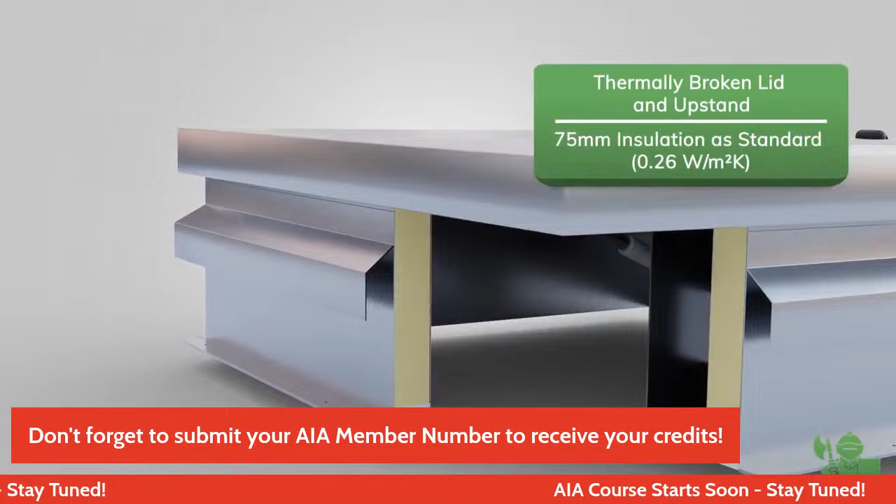The final touch is a wireless remote control, which operates the powered actuators, meaning no wiring is necessary. SureSpan roof hatches are fitted with an external curb liner as standard, ensuring easy on-site installation. The thermally broken lid and upstand with 75mm insulation provides a U-value of 0.26 watts per meter squared. Also available with a non-combustible mineral wool insulation. Did we mention no electrician is necessary? We simply don't accept that things can't be done better. Join our journey towards carbon positivity.

Who knew access hatches could be so exciting? By working with us early on in the design process, you can ensure your clients have a finished product they are happy with, with no expensive oversights or delays. We'll give you the technical advice and guidance you need when specifying these types of products.

As a global manufacturer, sustainability and managing our economic impact is paramount to our beliefs. We are continuously improving processes, products, and materials to reduce our carbon footprint. Initiatives such as our partnership with Ecologi allow us to plant a tree and offset our carbon emissions for every roof hatch we manufacture. We've recently been accredited with BSI quality certifications for environmental management and quality management systems. That's enough about SureSpan - let's begin the presentation.

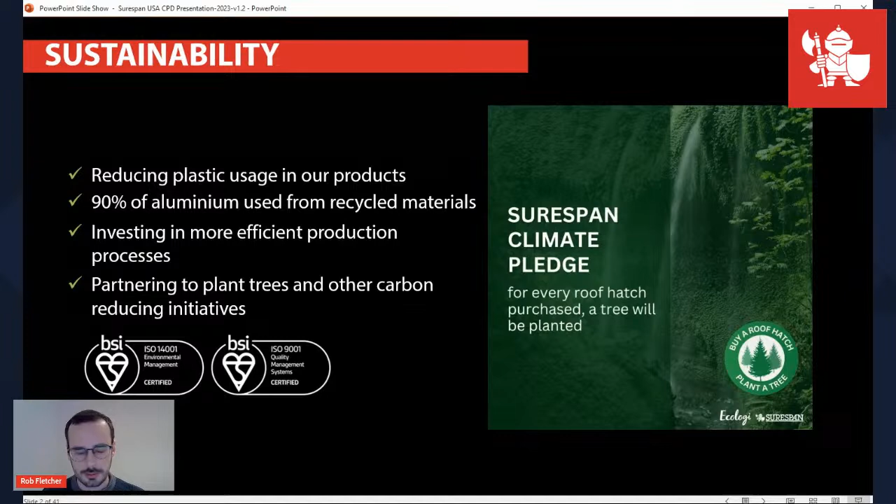Our learning objectives this afternoon are to provide good guidance and help create practical specifications for the safe use of roof hatches, with consideration to the client and the overall project requirements. Firstly, we will run through the specifications you need to consider for roof access, followed by the safety features and then performance. Once we've specified our roof hatch, we'll explore what bespoke solutions are available for more creative problems. Rounding off the roof access section, we'll have a quick look at ladders and then glass specifications, and finally moving on to considerations for large equipment and plant access doors installed in the floor.

Floor and roof hatches are used to access plant or equipment, either in basements or on roofs, to carry out maintenance to such areas. But note, we do not recommend roof hatches should be used as part of a fire strategy. When designing and specifying roof hatches, please also refer to the International Builders Code, OSHA health and safety standards, and work from height regulations.

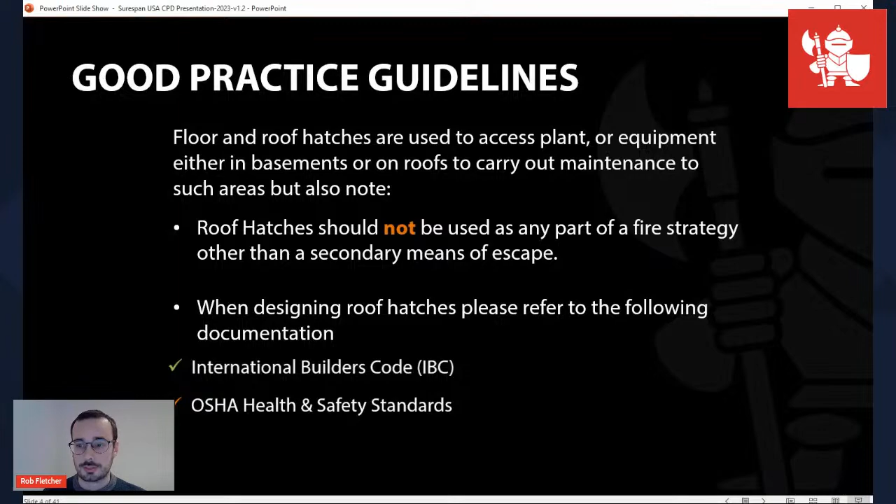We will shortly begin with the design and specification of roof hatches, from standard hatches all the way up to large bespoke designs to suit a variety of project requirements, from single leaf egress, as you can see in the top left, to large double door designs. There are multiple considerations and requirements you need to keep in mind, including wind and snow loading, how regularly these hatches are going to be used, and the kind of environment they're installed in. We'll touch upon all of this in the following slides.

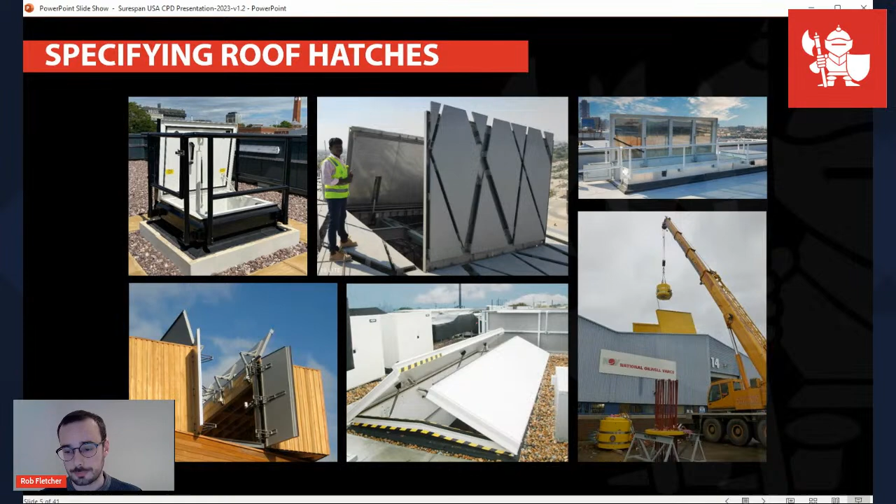When specifying a roof hatch, you need to consider the following. What type of lid do you require? Is it glass for natural daylight and a premium finish? Or is it just a plain solid insulated aluminum lid? Or alternatively, you could go somewhere in between with a polycarbonate dome.

Do you need secure locking or access from above? We'll touch upon this in the next slides. What type of gaskets and seals does the roof hatch come with as standard? Does it need to be airtight and weatherproof? What type of internal handle do you require to ensure safe operation? This internal handle can also be aligned with staircase handrails and other handrails to ensure a continual handrail line up the staircase. Is the hatch thermally broken, preventing condensation? Does it also come with an automatic locking safety stay?

What finish do you require? Is it a polyester powder coated finish as per the image, where we generally recommend white on the inside and a colour to match the surrounding roof on the outside, or blue, or pink, or red? Any colours are available.

Is the project going to be located in a corrosive environment such as near seawater, in which case you may need to consider additional powder coating, which is a higher quality finish, or stainless steel.

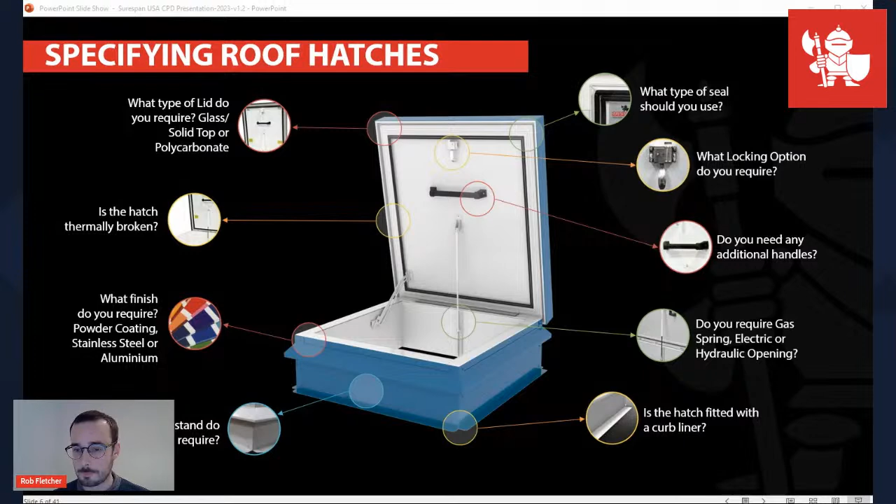These options very briefly give you an idea of the sort of things that you need to consider, but what if there's additional performance criteria that's required? The need for additional acoustic rating, for example, if used in a music auditorium. In these cases, roof hatches can be rated for up to 45 decibels.

If the hatch needs to be fire rated, ensure it is tested and certified. Fire rated roof hatches are available up to 4 hours rated to BS EN 1634-1 and UL standards. Generally, this standard, BS 1634, provides a more in-depth testing procedure compared to ASTM E119, as it tests more of the factors required for fire hazard or fire risk assessment under actual fire conditions. The beauty of this standard is that it considers the actual physical fire testing, but also ensures the manufacturer is quality approved to relevant standards to maintain that future products manufactured are as per the originally tested specimen.

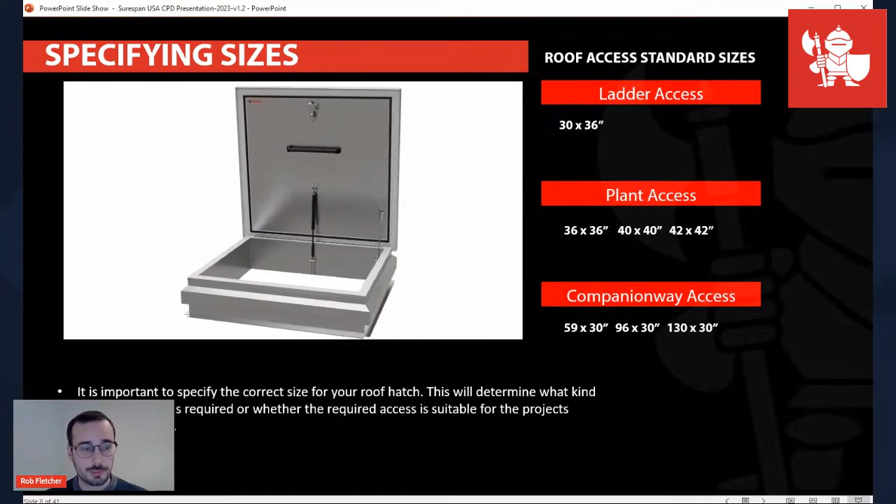Objective consideration should be given to specifying standard size products. That's fairly common sense. This not only saves money, but also saves manufacturing time and delivery expectations. Standard sizing is pretty generic within our industry, born from historical experience, practicality, and frequency of use. Whether the hatch is used for inspection, maintenance, or escape, the size should be carefully considered.

For standard access via a ladder or similar, a size of 30 by 36 inches is generally accepted as a standard size. If you are using a ladder with a safety cage, for example, you might want to go up to the next size, which is a 36-inch square. Again, that may be determined by the type of ladder being used. For maintenance access, for example, if you're carrying a toolbox or backpack up the ladder or staircase, larger sizes designed to be used with these types of ladders should be specified, which give you more adequate headroom clearance.

Bespoke sizes are of course available, but generally come with additional cost, administration, and delivery times. And let's face it, in design and build projects, the buyer likes standardization. So if the need is for a bespoke size, have a statement to support the requirement clearly at hand, so there's no mistake made from any change of specification or requirements.

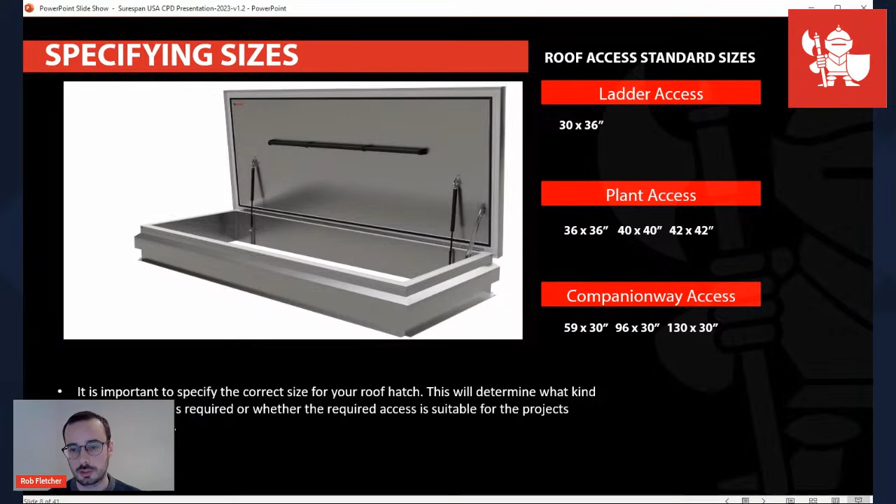We touched upon the requirements for thermally broken hatches on the previous slide. The importance of a thermal break present in the roof hatch is to minimize condensation. This is especially important in heated or cooled spaces below the hatch. The difference in temperature from outside and inside can lead to condensation unless there is a thermal break preventing this.

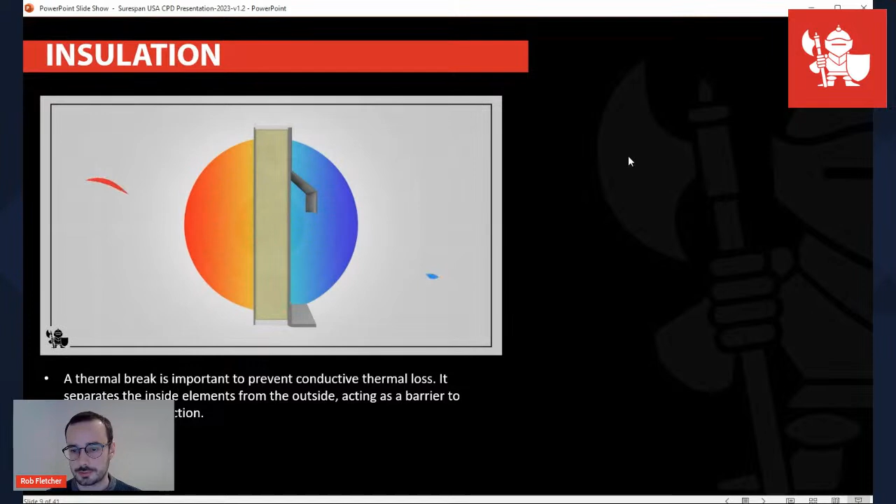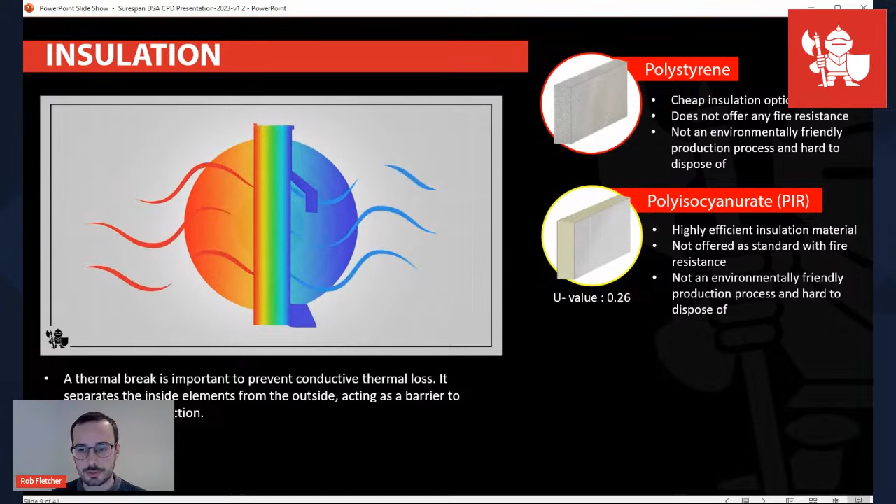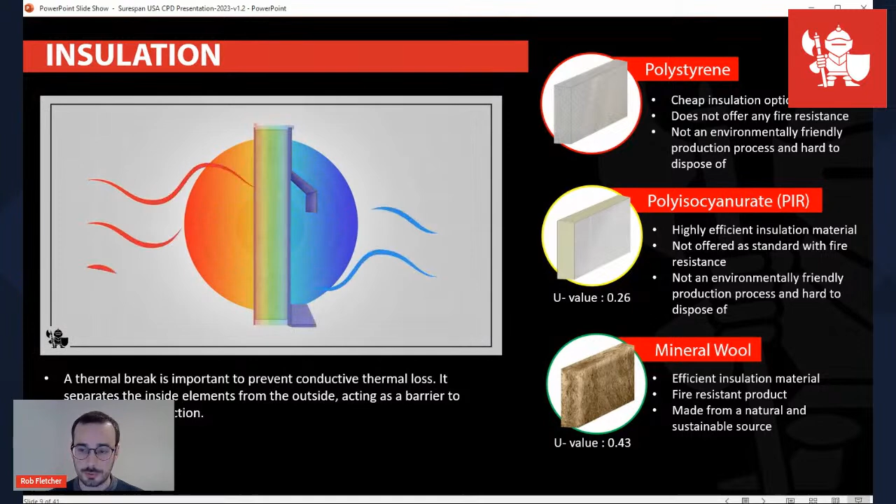Further attention should also be given to the type and thickness of insulation used within the hatch and frame. The most popular form of insulation is PIR board, which is polyisocyanurate, which generally comes in 2 or 3 inches. Standard is more 3 inches, which provides a decent U value. But there are alternatives on the market which are less energy efficient, but friendlier for the environment. So you can also specify non-combustible mineral wool insulation, which trades off a little bit of thermal performance for better non-combustibility, and it's more environmentally friendly.

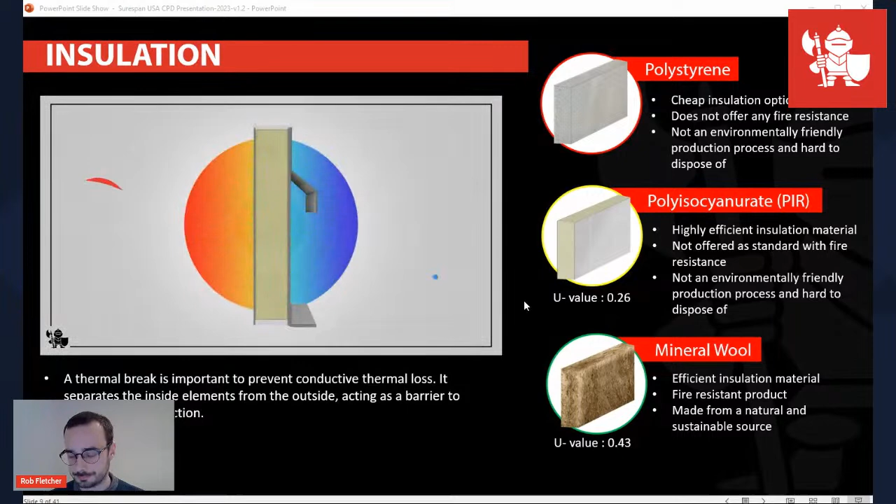Security of the hatch is an essential consideration. Assessing the risk management on a project-by-project basis enables you to tailor the locking options to suit. For example, does it need a padlock to prevent unauthorized access from below? Or maybe it needs an external handle to access from above. External handles are an important addition as the majority of hatches are closed when the operative is on the roof to prevent blowback, rain, or accidental falls.

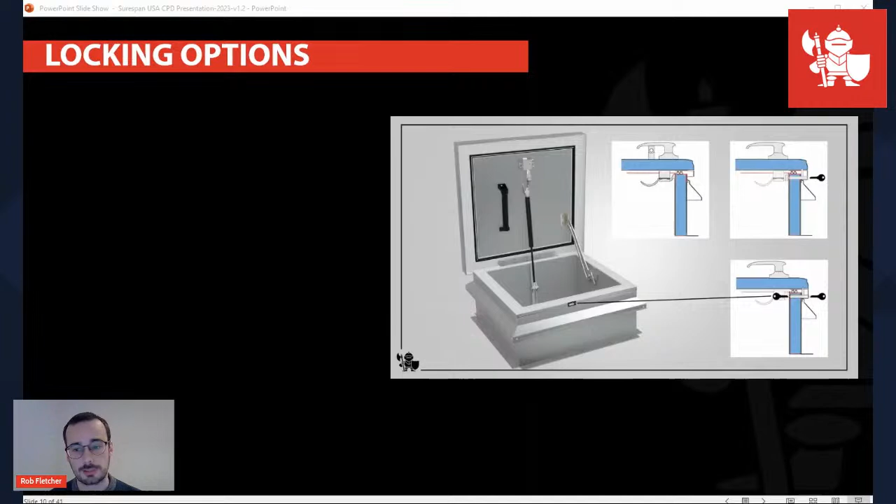If there is an external handle, you need to consider how you secure that hatch from the outside when not in use. You could look at external key locking or an external padlock if accessed from above. Inquire if your chosen manufacturer can meet your criteria. So this just gives you a couple of examples of the locking options available. Generally it'll come with an internal hasp and staple, which you can attach a padlock to. So that's ideal for securing the hatch from below.

But note, if somebody needs to access from above and it's padlocked, they obviously won't be able to open the hatch. You can also look at external handles with a padlock. So again, that's ideal if you're accessing it from above, but if somebody wants to access from below and it's padlocked on the outside, they won't be able to get out. In circumstances like that, you can also look at the key locking options, which come with a thumb turn on the inside, so it's easy to open on the inside, and an external key lock. You can also switch the thumb turn to a key to have an internal and external keyed hatch.

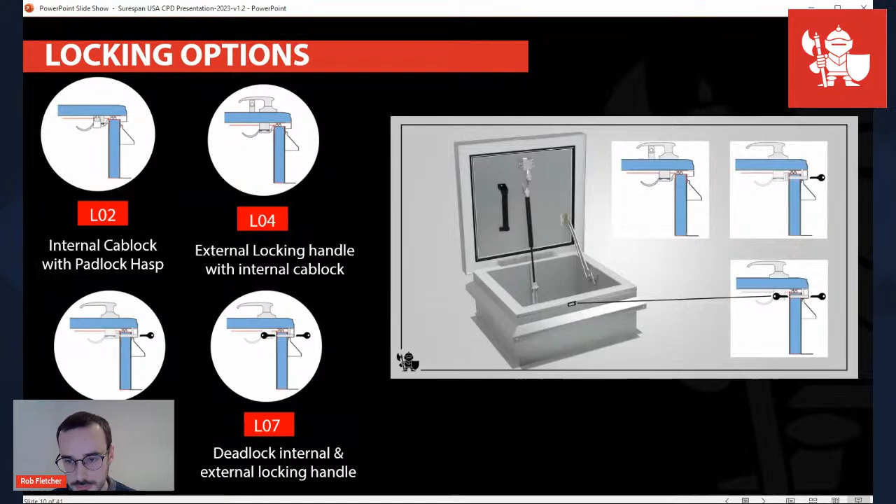Oops. Oh, I think that just crashed on me. Bear with me a second. Share screen. There's a slight technical issue there. It's Humpback Wednesday and my PC is like, I think I'm going to crash right now. That's very helpful. There we go, skip through some of these. Sorry, I'll just get back to where we were. There we go. Sorry about that.

On the topic of safety, the final point is to determine how to access the roof safely from a ladder. If there is not a man-safe system available to hook onto, you should always consider a three-sided guardrail with self-closing gate, this first option here. This is the perfect solution, which provides additional handholds if needed and preventative measures for accidental falls, and also prevents people walking over it. The guardrail should meet OSHA standards and be at least 42 inches high with a mid-rail.

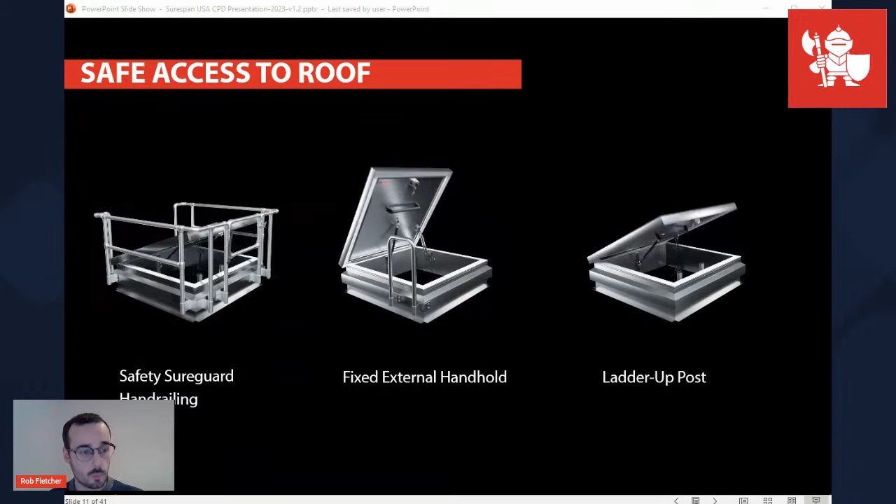If there is a man-safe system available, you could consider an external fixed handhold system, as shown here. This provides a permanently fixed handhold, which is there when needed and doesn't require manually retracting upwards. But if there's a fixed vertical ladder below, you can also look at the ladder up safety post, which retracts up manually as you're climbing up the ladder.

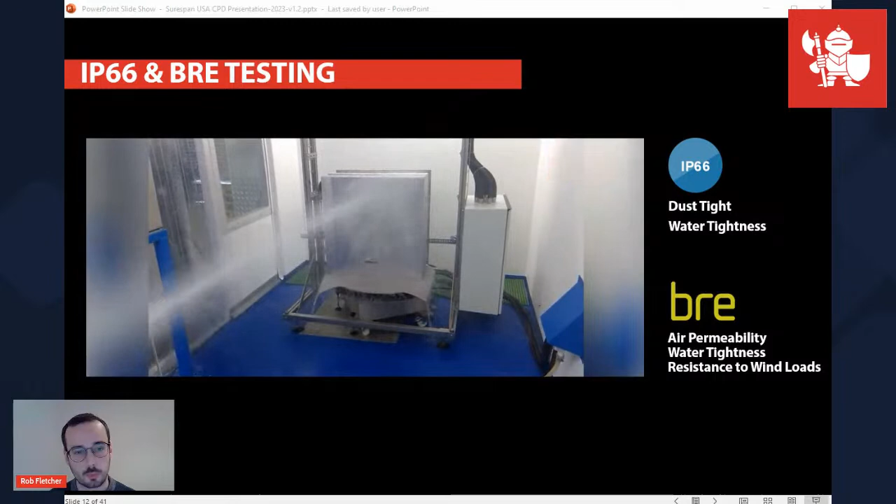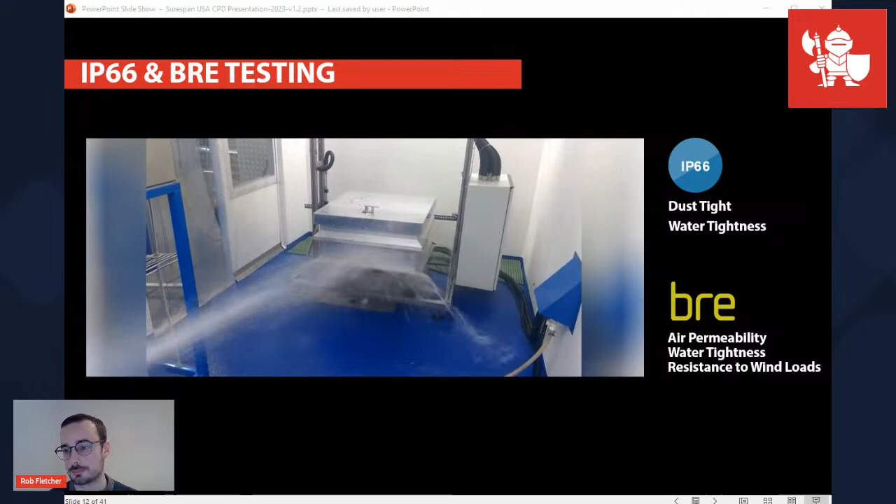Another key consideration is checking whether the hatches are tested to achieve watertightness, air permeability, and wind-resistant loads. Further consideration should be made depending on the state in which the products are specified, such as Miami-Dade building regulations in Florida. We recommend checking with the local building controller. Air permeability is an increasingly common requirement. It is costing more and more to heat and cool buildings, and maintaining that positive pressure is crucial to improving building efficiency and overall green credentials.

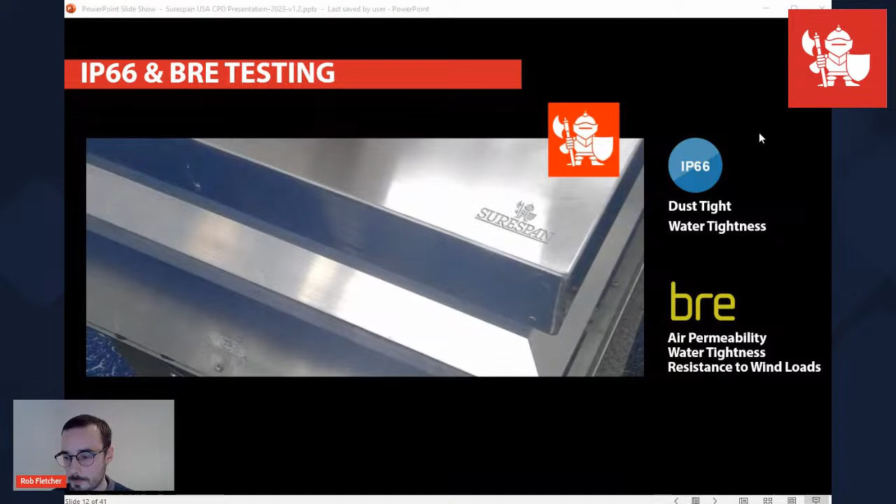For powered opening doors, electricians will generally have to be on site to wire up the switches to the hatch, which can incur additional cost and time on site. So you could look for solutions such as solar-powered hatches that come pre-wired with a remote control for roof egress. So it's basically out of the box, ready to be used. You get it on site, install it, press a button and it opens for you.

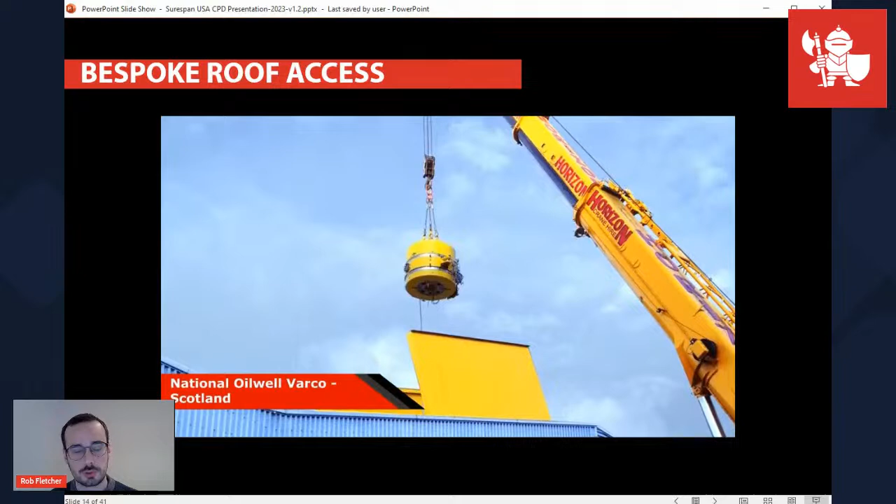We have covered standard options and specifications. This short video will highlight a few solutions to problems utilising a bespoke solution. It's always worth talking to the manufacturer when looking at non-standard items, as they can provide suitable advice and guidance and ensure all options and possibilities are allowed for.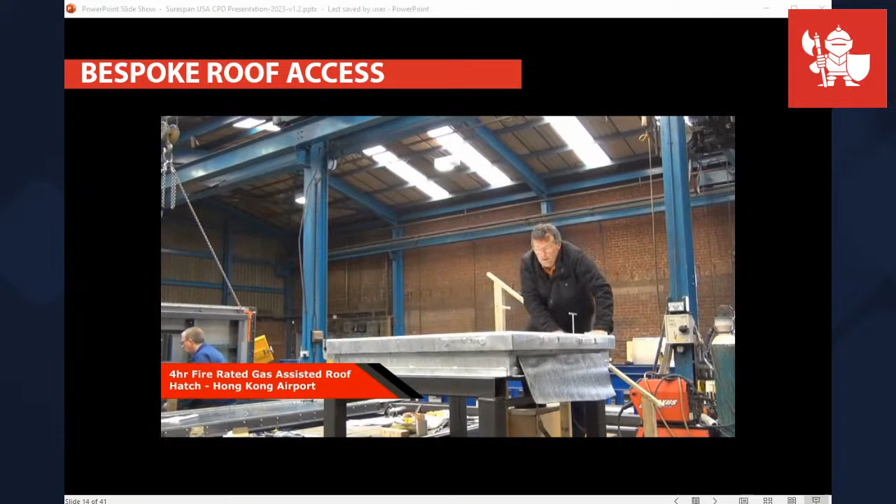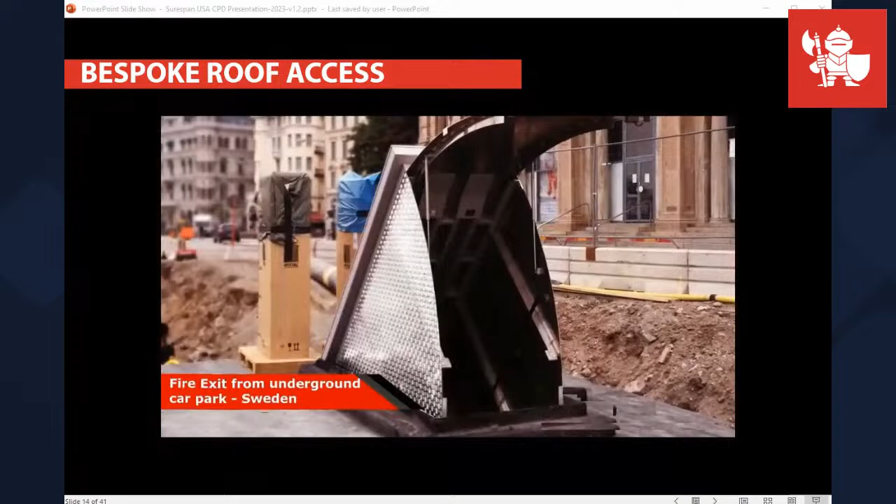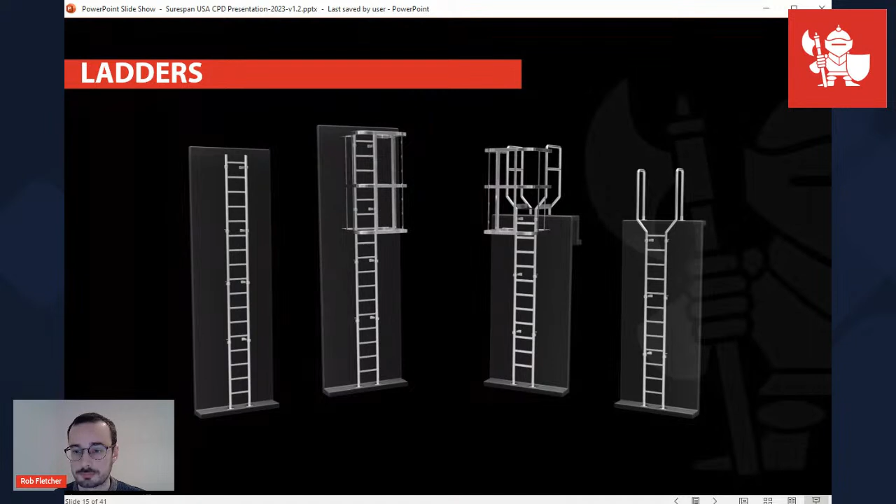That pretty much covers our roof access portion. We've specified our roof hatch, we've looked at the options, the locking, the performance. Then we're going to have a quick look at the different types of ladders that can be used with roof hatches.

Now, work at height is the biggest single cause of fatal and serious injuries in the construction industry, particularly on smaller projects. Over 60% of deaths during work at height involve falls from ladders, scaffolds, working platforms, and roof edges.

Typically, there are three types of ladders used to gain safe access. They are all fixed solutions. Removable ladders have generally been a slightly negative solution with risk managers, as vastly more accidents are reported using removable ladders than fixed solutions.

The first option we'll have a quick look at are vertical ladders. These are fixed back to the wall and can be used both internally and externally. They're ideal for regular use. Generally, ladders like this are manufactured in marine grade aluminum or galvanized steel. We prefer aluminum for its resistance to corrosion, lightweight properties, and it also opens up the option to polyester powder coat the finish to match the surrounding roof or walls.

The next option is ship's ladders, sometimes known as companionway ladders. These are ideal for maintenance use, for repairs and plant access, allowing operatives to climb up the ladder safely while carrying a toolbox. They are used for both internal and external access at an angle of 65 to 75 degrees.

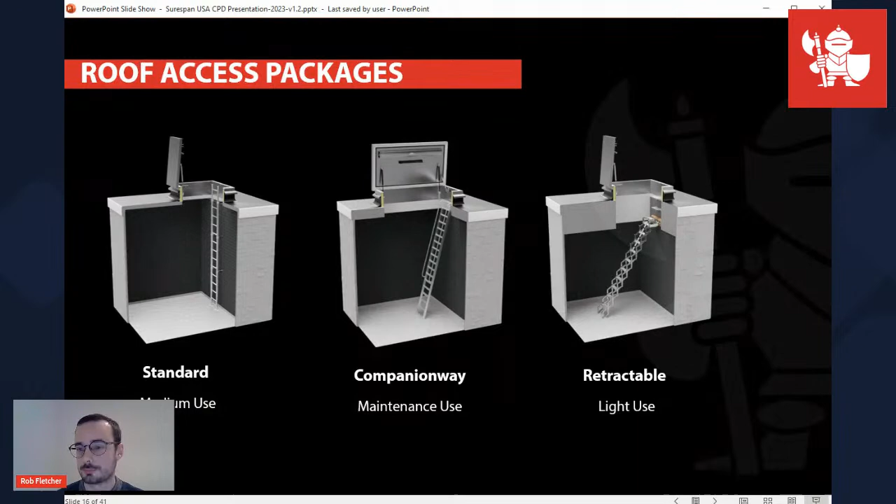The final option we'll have a quick look at are retractable ladders. These are generally designed for infrequent use, often to access lofts, mezzanine floors and crawl spaces, but also commonly used to access through roof hatches. Commercial retractable ladders are similar to the style often found in homes for loft access, but much stronger, carrying loads of up to 440 pounds per tread. They are manufactured in a robust aluminum construction and offer a counterbalance spring operation.

There are generally two types of these concertina ladders. You've got the standalone standard zip ladder, which is ideal for a floor-to-ceiling height spanning up to around 11 feet. Anything above or even below 11 feet, a more bespoke option can be specified, which comes with its own wooden frame and integrated ceiling panel. These can be manufactured to suit a climb height of around 15 feet.

These bespoke ladders are also available opening from above and electrically operated, with further options for 30, 60 and 90 minutes fire rating at ceiling level. Both the standard zip standalone ladder and the Zip 8, the ladder that comes with its own trapdoor, come with a telescopic handrail for additional safety, and they're easily pulled down with a hook on a pole.

When specifying these styles of ladders, the first consideration is the floor to ceiling height, and the remaining ceiling to roof level. The minimum depth to house a retractable ladder is around 25 inches. If you supply a separate ceiling access panel below this, you need to increase it to allow for the depth of the ceiling access panel.

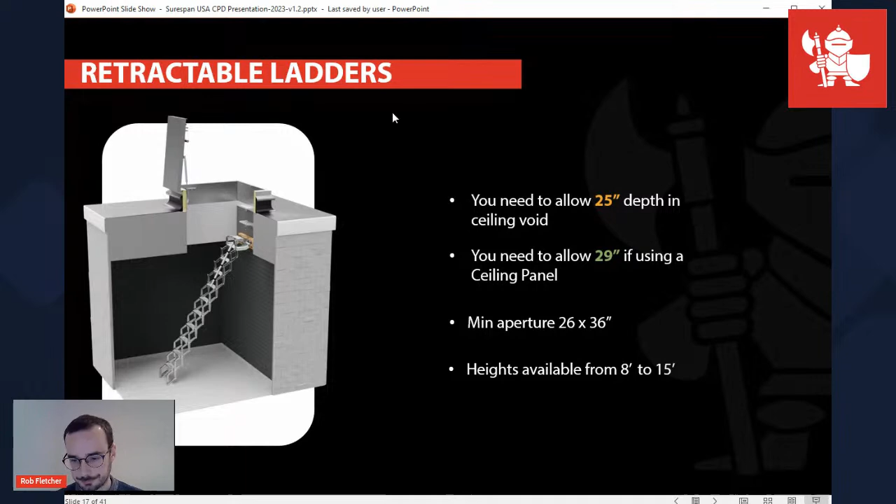So that was a very quick look at ladders. We're now going to look into the specification of glass skylights and horizontal windows. So we're changing tack slightly. Glass skylights are a hot topic at the moment. The health benefits of natural daylight are very well documented, along with residential properties looking to the skies and extending up to the roof, creating large terrace access areas for entertainment or for popular widows' walks.

A lot of principles we touched upon for roof access also apply to glazed access. The biggest thing you need to take into account is that these hatches will be more regularly used, and as such it needs to be as safe and as straightforward as possible. Most glass skylights that open have to be powered due to the weight of the glass. This is often operated by a simple push button or wall mounted key switch at the bottom of the staircase. And we always recommend that the operator should have line of sight with the hatch when they're opening and closing it.

Other options such as digital keypads can also be specified. You can also look to include a vertical opening door at the top of the stairs for easy step-free access. So this image here shows a brief example of a glazed skylight with a vertical end door. This is ideal in residential situations as there's no large step over or curb that the user has to step over to gain access to the roof. It's a lot safer in that regard. And that door can be made to pretty much any height.

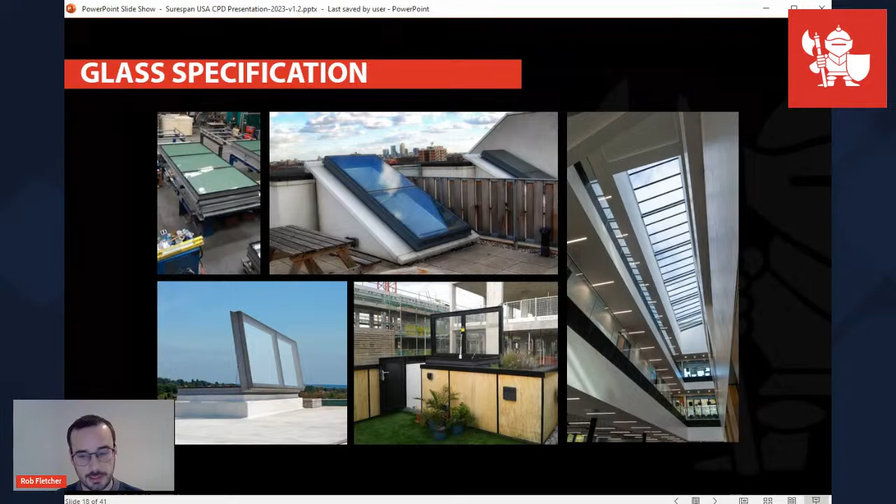So when looking at glass specifications, you should consider the following points. Is the glass toughened and laminated? Laminated inner panes, particularly from our point of view, are a highly recommended safety feature. In case of breakage, no glass will enter the living area below. And it's remarkable how many skylights you see in this day and age that don't have a laminated inner pane. And these can be anywhere from schools or libraries or someone's kitchen. And then if anything was to happen to that skylight and it broke, the room below has a high chance of being covered in fragments of broken glass. That's why we highly recommend a laminated inner pane.

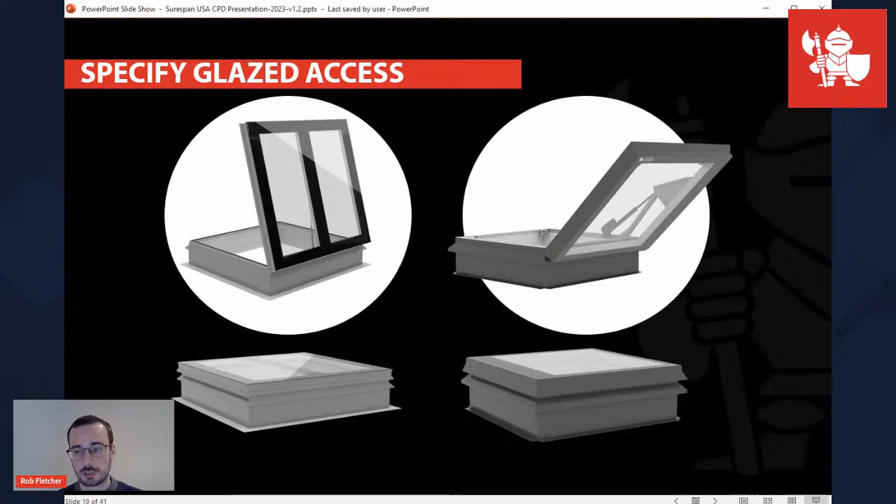Is there a particular solar G value you're looking for? So the G value is sort of the heat transfer coefficient of that skylight. There's various different glass finishes, which we'll touch upon in the next slide, which help you make a more informed decision on whether that's something you need to consider. The other things you can think about is how the skylight will be used. Is it just fixed for daylight? Do they want it to be open for ventilation purposes or access purposes?

There is a range of finishes available that are suitable for different requirements and environments. We recommend glass should come with self-cleaning glass as standard. This glass generally has a protective film which breaks down debris and dirt. We always recommend installing these skylights at a pitch of at least 5 degrees to ensure adequate water runoff. In hotter areas, it is recommended to select a higher performance solar control glass to minimize the heat transference. So solar control glass comes in a couple of different tints, but it's generally a slightly blue tint, and that will reduce the amount of heat that is transferred from the outside to the inside. So it's highly recommended in hotter areas.

You can also opt for tinted glasses, which might not have the same sort of reflectivity, but they'll reduce the glare from the inside. And finally, walk-on glass can also be specified. Again, glass is, in its nature, incredibly slippy when it's wet. So we recommend a dot matrix or anti-slip pattern. And as with all roof hatches, always ensure your glazed skylight is thermally broken and insulated.

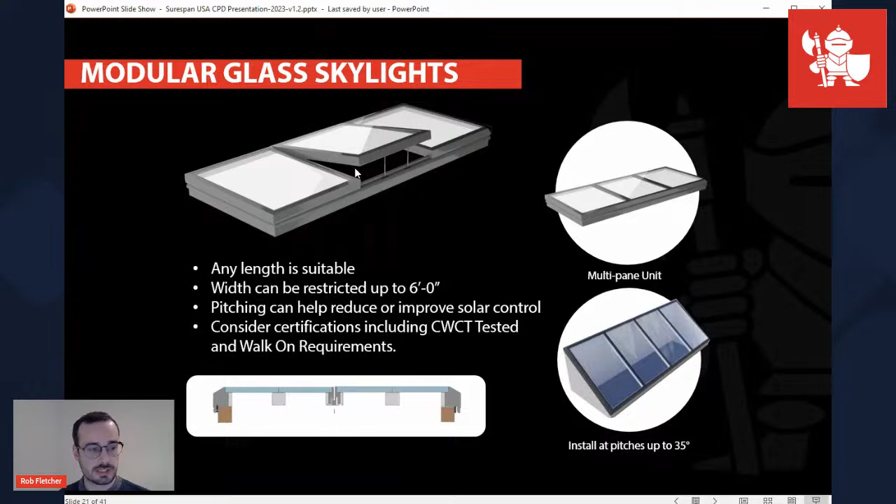Have you ever come across a project that needs occasional access to replace large power plants, generators, or even MRI scanners? It's not uncommon to come across this problem where hinged solutions may not meet your requirements. There are a few main drawbacks with hinged units. So up until this point, we've all looked at hinged opening doors that open sort of like that or like that.

The problem with these is they don't always open to a full 90-degree clear opening. They generally open to about 85 degrees, which reduces the available clear area. And issues specific to larger hatches - when they're open, those doors can act as a wind sail.

So specifying sliding hatches overcomes these issues because they provide a maximum clear opening without overcomplicating the operating process. Some of these sliding hatches can even be manually slid open.

There are two main types of sliding hatches: those that come with a telescopic rail, often used on smaller hatches, less than 4 foot square, and those that come with roof-mounted fixed rails. When the sliding hatches are electrically operated, ensure the motor is easily accessible, and it can also provide a manual override. For areas that need to be watertight, ensure the sliding hatches are thermally broken, insulated, and weatherproof.

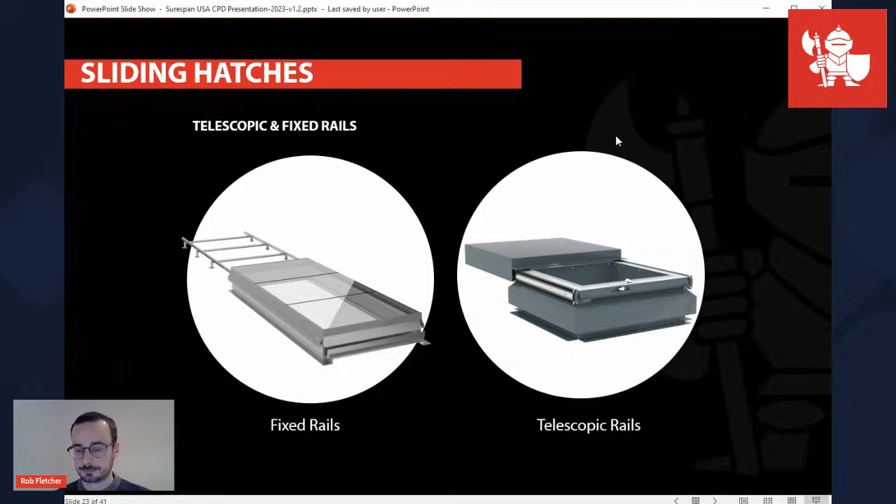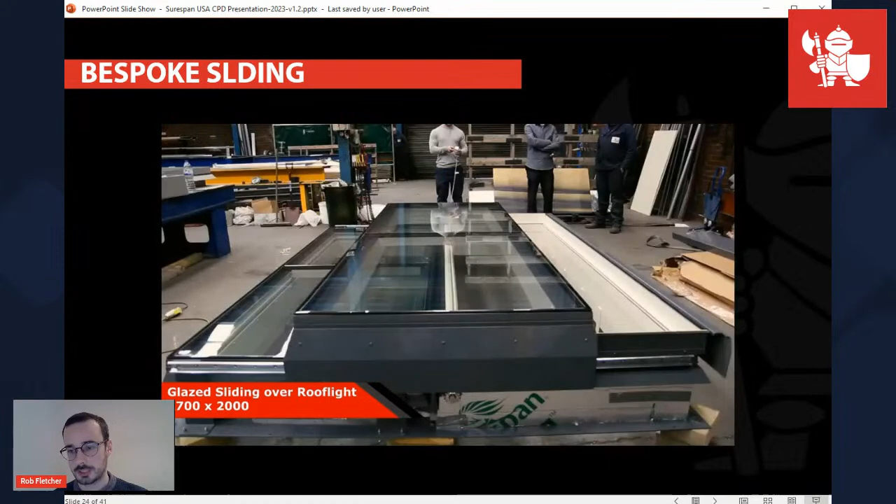The following video will highlight some sliding access solutions from residential applications, all the way to military use and the aforementioned US Navy projects that we have worked on.

Okay, so that's pretty much the roof access and ladder portion out of the way. We're now going to look at design considerations when looking at floor hatches.

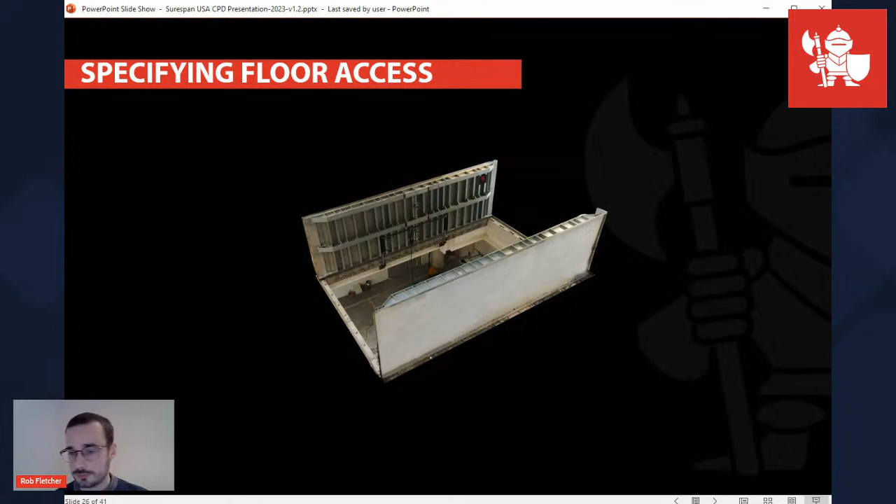So the design considerations for a floor access hatch are different to that of a roof access hatch. They often have more complex design requirements, taking into account various wheel loads, point loads, distributed loads, additional fire rating and acoustic rating requirements. Other areas that you need to consider are the material of the hatch.

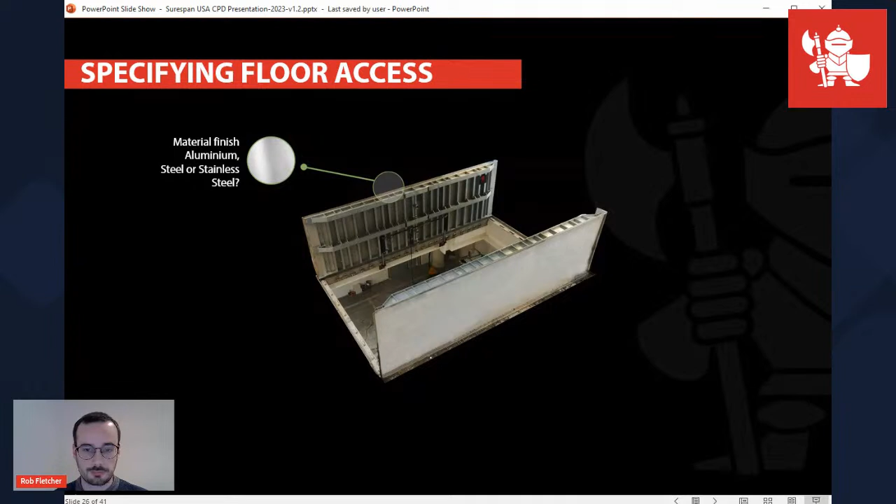Is it being installed in a water treatment plant with corrosive chemicals? Then look at stainless steel. If it's heavy duty loadings, again the material choice will impact the size and loading requirements that the hatch is able to achieve. So generally our much bigger floor hatches that we manufacture are stainless steel. We have also done a few in mild steel and aluminum.

All of these factors will determine what kind of operating mechanism is available to use. So large heavy duty covers, like the one you can see here, will be hydraulically operated, while smaller covers can be gas spring assisted, just like a roof hatch, or powered with electric openers. There's also additional options such as lifting points for a lift-out hatch. So instead of it being hinged, you can have a fully lifted out cover, and the benefit of that is, again, it'll give you the maximum clear opening.

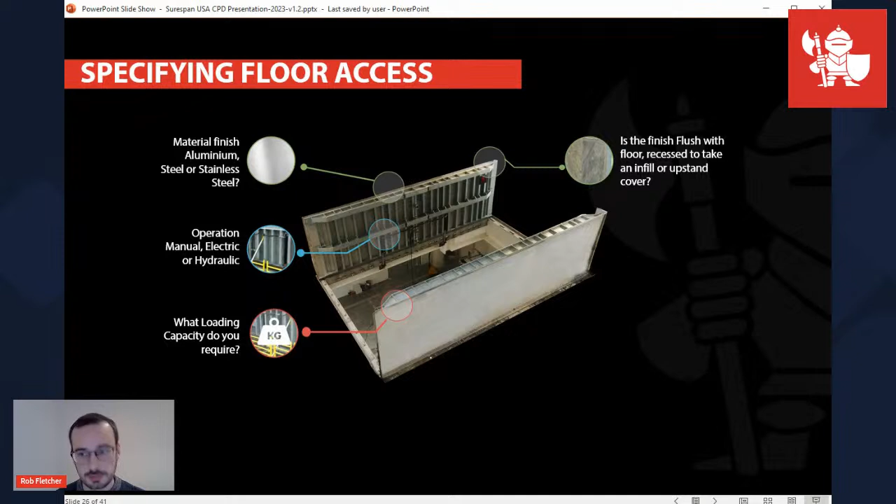Does the lid require an infill finish, such as timber or stone? What is the minimum depth of flooring infill that you can get away with? We recommend keeping it lower than 2 inches to save on weight, as deeper and heavier infills will need additional strengthening. If no infill is needed, a tread plate or plain plate lid can be specified.

What fire ratings do you require? Are there any acoustic rating requirements? Where is the hatch situated? Will it be frequently walked on by pedestrians? If so, does it need to have an anti-slip finish for safer use? And how will the operators work around the hatch? Is it recommended that there are guardrails or safety grids to prevent accidental fall-throughs?

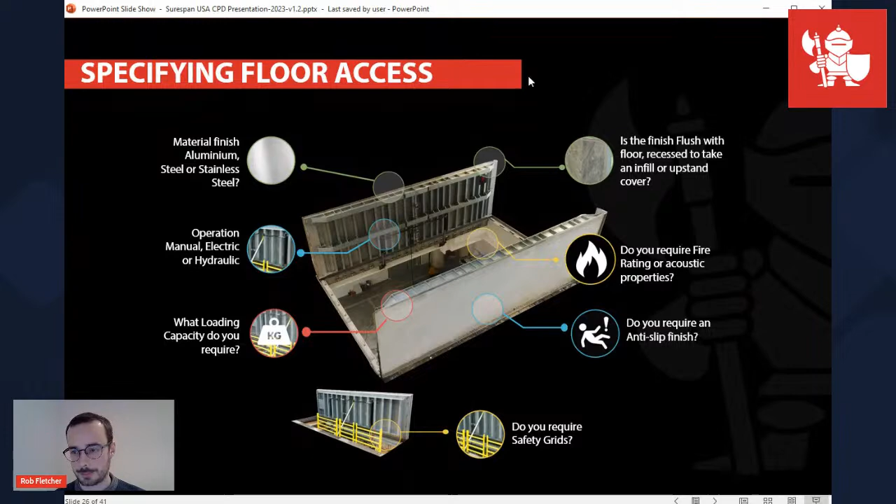Touching back on loading requirements, there is a wide range of scenarios, environments, and considerations that need to be taken into account when specifying a floor door. From a 30-something-year-old 150-pound loader to grand pianos - in this particular job for the Royal College of Music, which was designed to take a grand piano - to heavy-duty dockyard and machinery plants.

There's a wide range of loading parameters that determine the type of loading and how that loading is imparted onto the cover. For example, a forklift is a specialist floor load, as we need to consider the point loading of each wheel in many positions within the boundary of the cover. If possible, we like to have a data sheet on the forklift to see how that weight is distributed, the wheel track and the centres, what type of wheels it has, whether they're solid or pneumatic, as all of these factors can contribute to the loading requirements that we need to design for.

If the loading is PSF, pounds per square foot, you need to factor in the size of the door. For example, we recently quoted a 22 foot by 8 foot floor door at 300 PSF. And when calculated, this equates to around 13,000 pounds, providing it was distributed evenly over at least 25% of the area.

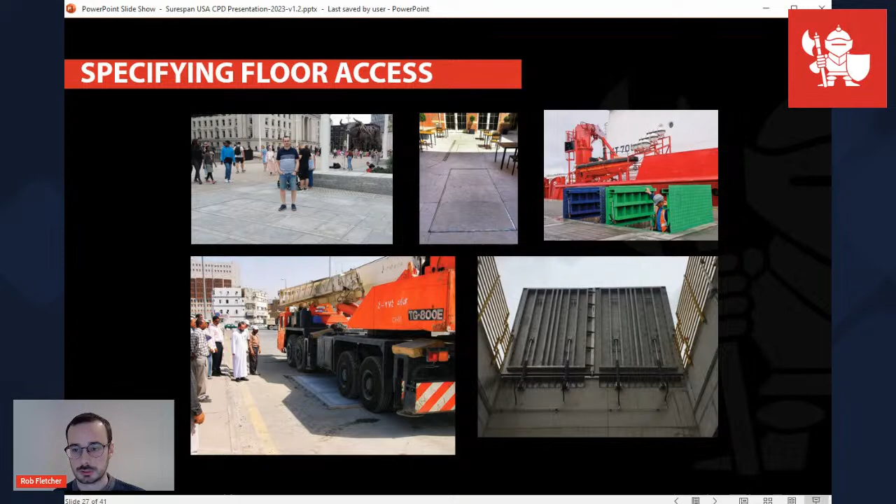This is just a little case study to give you an idea of various loading requirements. We worked alongside a large energy and waste plant in Scotland, and they needed a hatch to open for the large 15,000 lb crane grabber to come through. You can see these crane grabbers here. This colossal hatch needed to achieve a full clear opening of 18 foot by 18 foot for the crane grabber to fit through.

They specified a sliding hatch design in order to get the maximum clear opening. The main issue we faced was the actual crane grabber needed to rest on top of these covers when opened. So if you imagine these crane grabbers with the claw fully opened, each of those individual claw points imparts its own loading onto the cover.

To combat this, Surespan engineered a reinforcement section within the lid which achieved the load requirements. You can see a quick design there of the circular reinforcement section that was included. I don't know if you can make it out on the site photo there, but there's a slight round reinforcing section.

In addition to the crane grabber loading, we also needed to factor in a 20% increase of load for the speed at which the crane grabber was lowered onto the cover. This is just a small example of the loading requirements that needed to be accounted for in a specialist environment.

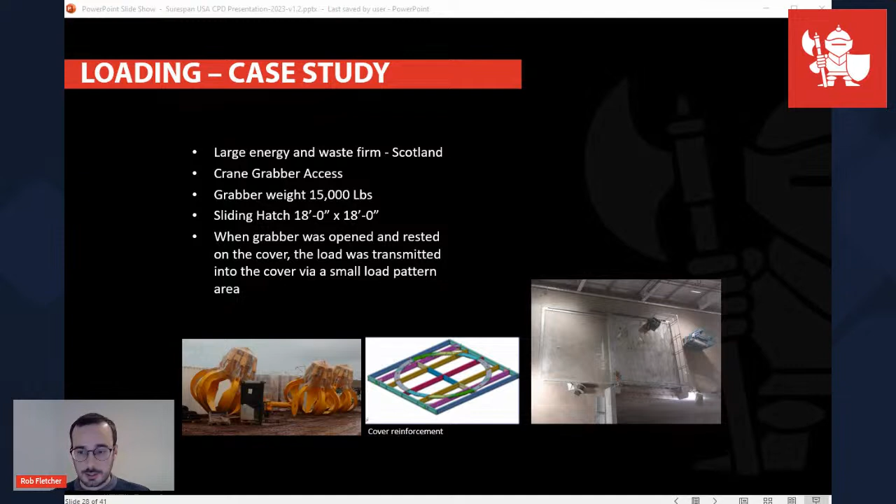Floor hatches are generally designed to sit within a rebate within the floor. These are anchored through a fixing flange here and here, and backfilled with concrete or screed. A floor door is designed to take the loading without weight-bearing concrete within the lid. This does mean that the frame detail we create may vary depending on the size, loading performance, and material of the hatch.

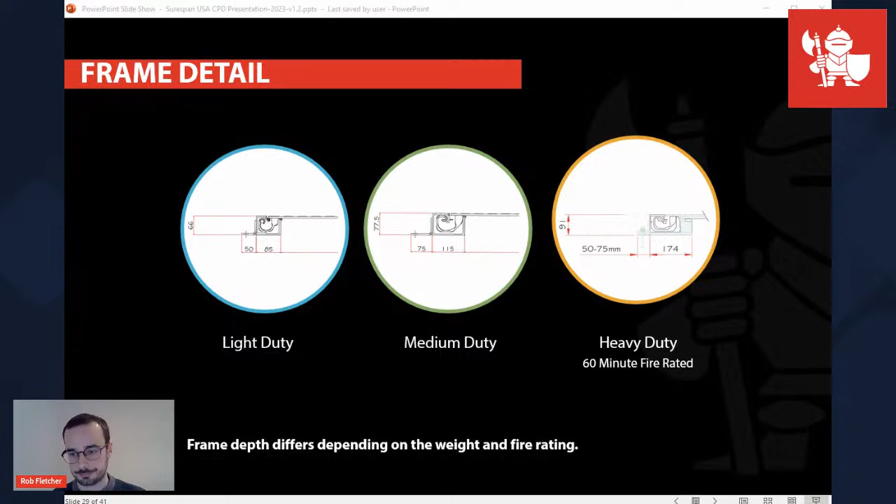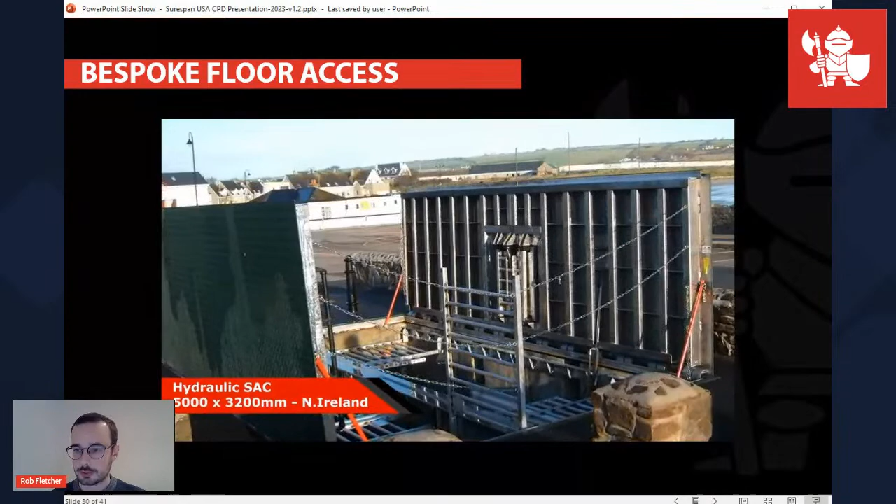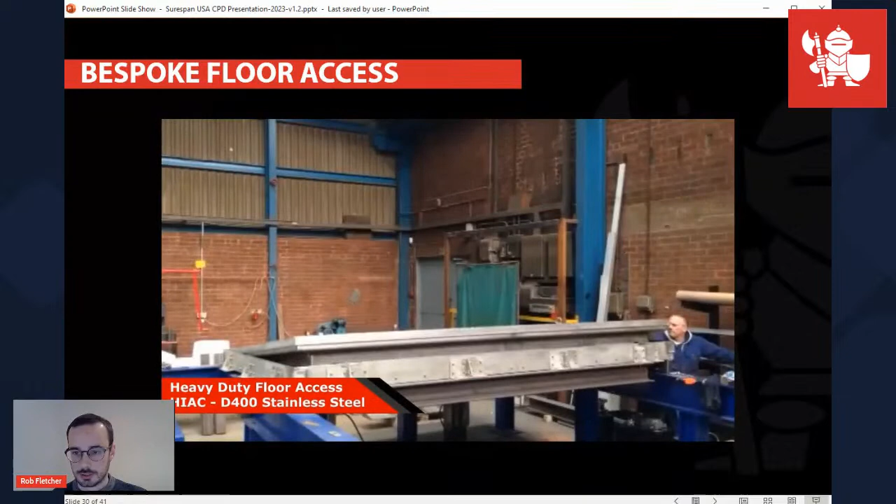But where an insufficient rebate can be provided, fixing angles can also be designed for internal fixing. Custom floor doors can be manufactured for a wide variety of solutions, including individual access hatches within the lid, such as the job shown here - a smaller personnel access hatch within that lid. They can be specified with walk-on glass.

Another consideration you need to take into account when looking at heavy duty loadings: the depth of that cover will increase because of the additional strengtheners. So if you notice on this particular example, the sheer size and depth of that lid was purely designed to take the heavy duty loading.

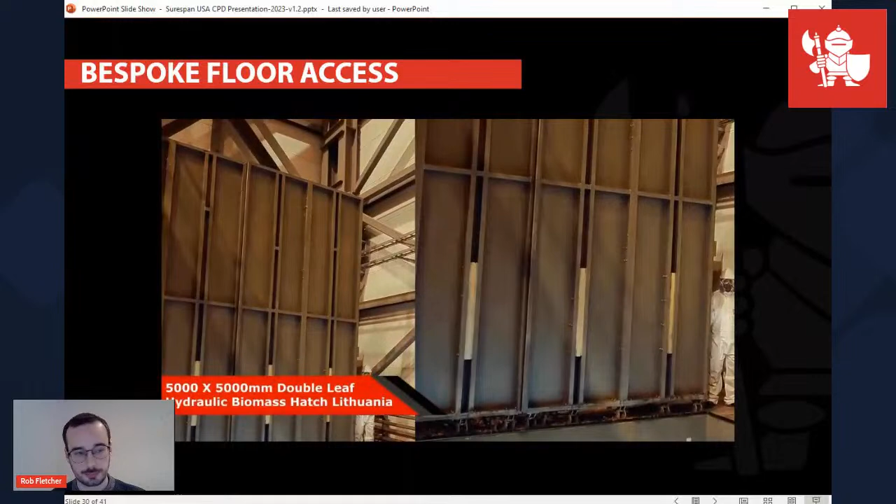As an example of walk-on glass with a dot matrix pattern, just for anti-slip performance. This particular hatch that was supplied to Lithuania was for a biomass fuel plant. They needed to achieve a maximum clear opening, and the way we managed to do that with the limited space available was to fit the operating mechanisms at the back of the hatch.

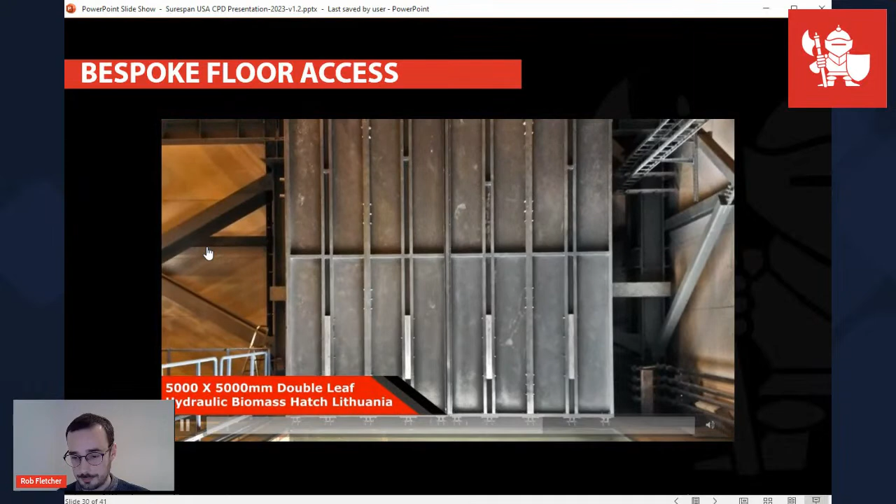But when the hatch was fully open, there was a maximum clear opening.

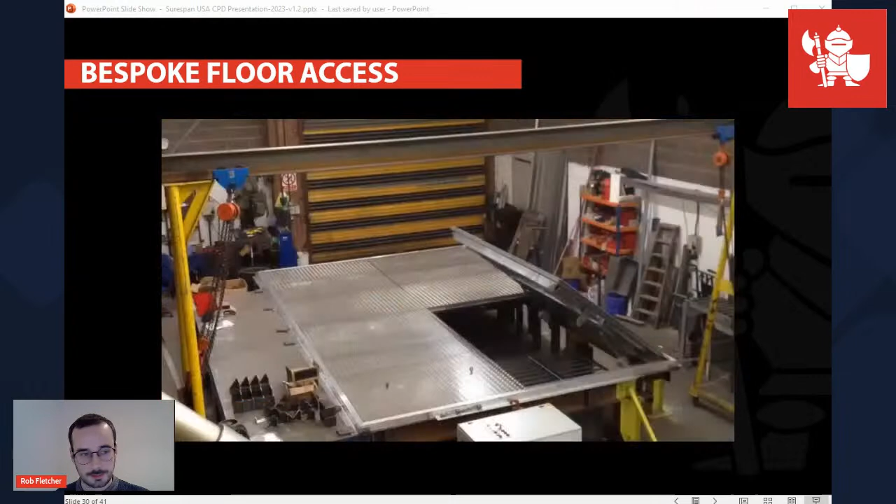This particular hatch you can see on the screen was a fully automated design. Even the central support beam and safety grids were electrically opening, so it was a fully turnkey solution. You turn the key, hatch doors open, safety grids open, and the central support beam also opens.

Now the support beam is generally used on much larger hatches which span large distances and require heavy duty loadings. This support beam in the example shown was a lifting-out support beam, but we can also do a removable central support beam - just a beam down the middle of the hatch, which you remove when accessing it. But we can also integrate that support beam within the lids of the hatch, so there's nothing obstructing the opening.

In summary, we have looked at the following key objectives today. We looked at specifying the correct hatch size for access via ladders and maintaining headroom clearances according to building standards. We touched upon the security and safety options you can consider with roof hatches. We explored a few ladder options, looked into different types of glass specification and the importance of laminated and toughened glass, and finally we've gone through the specification process for complicated floor doors.

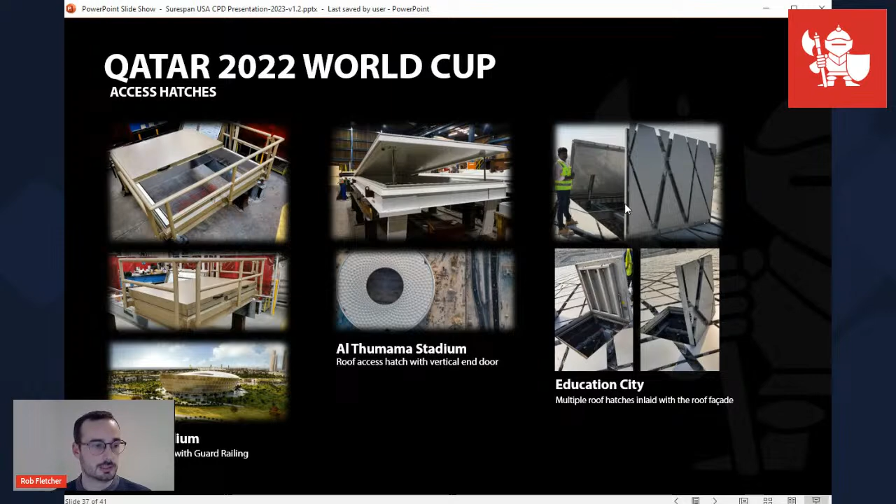Power plants, utility and waste management facilities operate a wide number of large pumps, machines and heavy-duty equipment which occasionally require servicing or replacing. Our floor hatches provide easy, hassle-free access to these areas where similar style grated floors and concrete panels cause additional costs and safety issues when removing. Paired with our huge portfolio of specifications, from the aforementioned HS20 loading to fire rated to lift out, we are sure to have a solution that meets your project requirements.